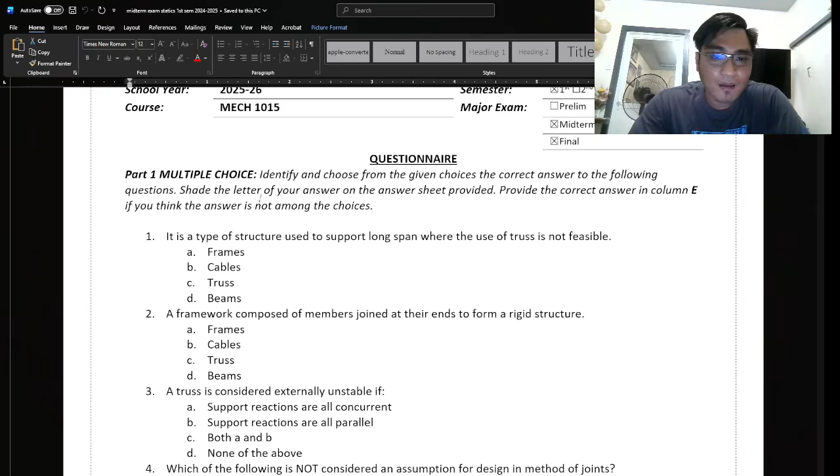So let's start para di na magtagal yung video. This is part 1. Let's start with the first 3 parts. Part 1 is multiple choice.

First question: it is a type of structure used to support long span where the use of truss is not feasible. The answer here would be cables, tama, kasi yun yung ginagamit natin. That's why you see cable type bridges like your mga big bridges na ang span niya masyadong mahaba, hindi pwedeng gawing truss.

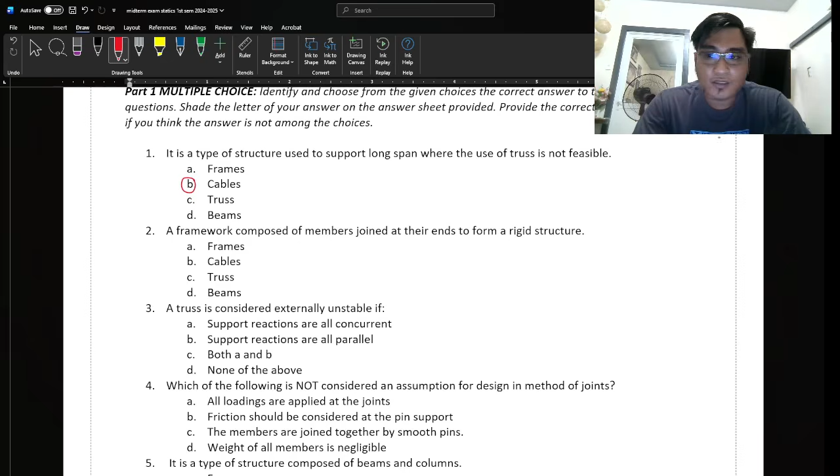Next question: it is a framework that is composed of members joined at their ends to form a rigid structure. Again, that's one of the basic definitions or characteristics ng ating truss. So the answer here is truss.

Number 3: a truss is considered externally unstable if support reactions are all concurrent, letter B, reactions are all parallel. So these are both correct. If it's concurrent, magiging unstable siya.

Tama, kasi for example you have a basic truss here. Let's just draw a very basic truss. So that's a truss. For example, I have a pin here, tapos dito magkalalagay ako ng roller. So ang support reactions mo would be eto, tapos dito. Kung papansinin mo, lahat sila tatama sa point A. So this will cause, ma-imagine mo, if I put a force here, no reaction would try to stop this from going down. Iikot lang yan.

It will just rotate at this point of concurrency, so unstable to. Same goes with if my supports are parallel, letter B. Pag parallel daw siya, tama. Since parallel siya, lahat sila vertical, there's again no one stopping the truss from moving horizontally. So both A and B are unstable. So the answer is letter C.

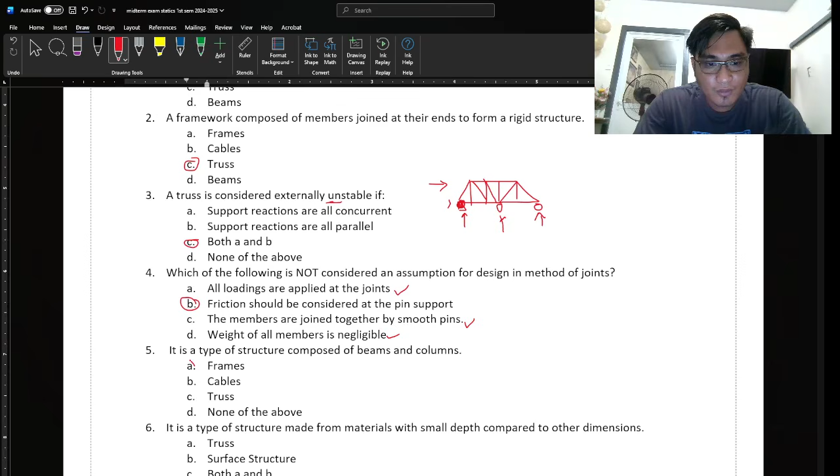So okay yan. Number 5: it is a type of structure that is composed of beams and columns. Binabanggit ko naman yan, lalo na nung nag-discuss ako. The answer for that is frames.

It is a type of structure that is made from material with small depth compared to other dimensions. The answer here is letter B, surface structure. Number 7: the combination of structural elements and materials is called, kita naman dyan, structural system.

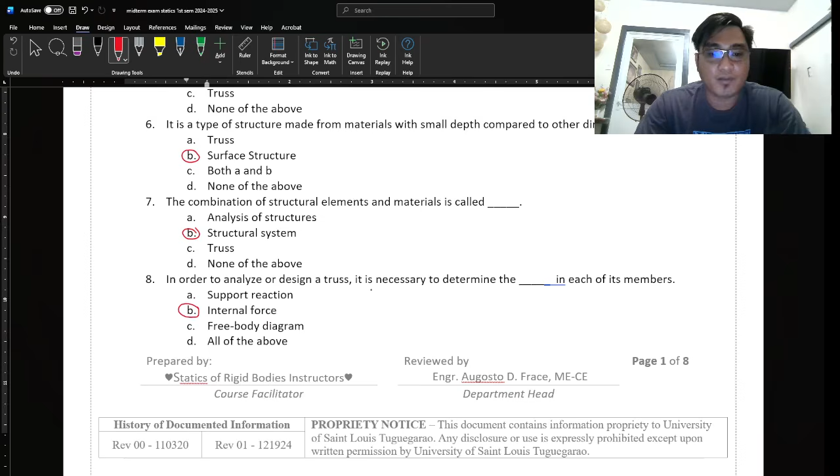Number 8: in order to analyze or design a truss, it is necessary to determine the blank in each members. Dito, hindi pwedeng all of the above kasi wala namang support reactions ang bawat member. The answer only is internal force. The internal forces are the tension and the compression force acting on each member. That's why we want to solve the internal forces of each members. So that's it, that's 8 points.

Next, determine the stability and the determinacy of trusses. Dito, napakasimple lang naman nung formula natin, which is yung ating b plus r, ko-compare natin yan, that's a question mark, kukompare natin yan with yung ating tinatawag na 2J, which is yung twice ng ating number ng joint.

So dito isa-isa lang rin: 1 to 23, so I have 23 members. Plus 1, 2, 3, 4, tama, pin-pin yan, so plus 4 reactions. This is comparing it to ating 1 to 13 joints, so that's 13 multiplied by 2, and this is just basically 27, which is definitely greater than 26.

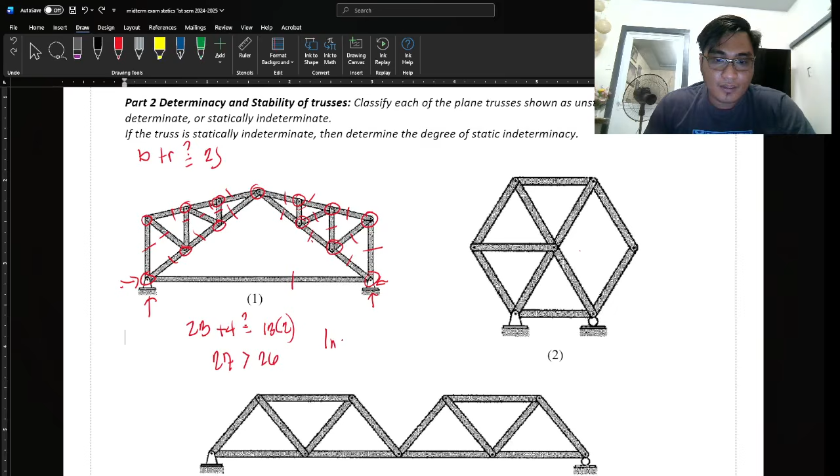So the answer here is, okay wait lang, let me just correct this. Indeterminate.

So to make it more specific, this is a first degree indeterminate structure. Why is it first degree? Kasi the difference between 27 and 26 is 1. That's why it's first degree.

So dito naman sa number 2, this is 1, 2, 3, 4, 5. So that's 5, 6, 7, 8, 9, 10, 11 members. So this is 11 plus 1, 2, 3. Tama ba? So 3. So this is comparing it with 1, 2, 3, 4, 5, 6, 7. So 7 times 2, this is equal to 14, equal to 14. So therefore, this is determinate.

Pero wait, what if it's unstable? Kasi not all determinate structures are stable. So let's look at the external supports. Since this is a basic pin roller combination, it's not parallel. Tama, hindi naman parallel yan kasi meron kang horizontal dito. It's also not what do you call this? It's also not concurrent. Tama, hindi naman sila nagko-coincide. So again,

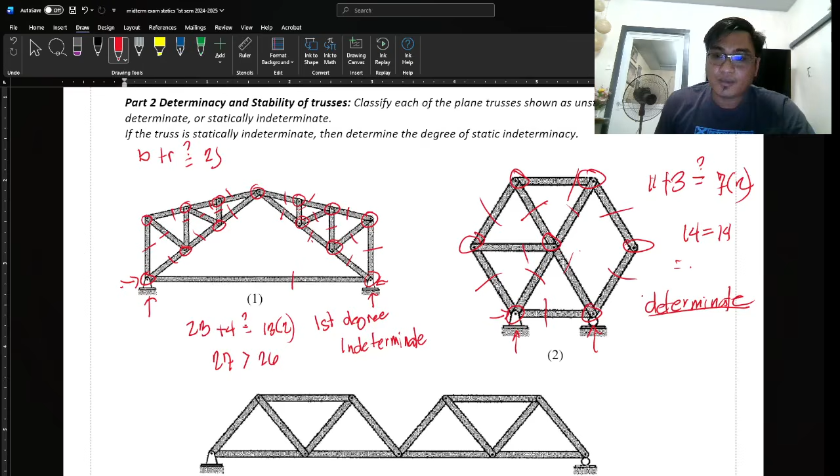That is now stable and determinate. Or kung determinate lang nilagay nyo, okay na yan, no?

So, dito, tama, balikan lang natin. Sa answer sheet, saan sa answer sheet? Yan, sa answer sheet, dito, first degree indeterminate. So, dito naman is determinate lang or pwede mong lagay determinate and stable.

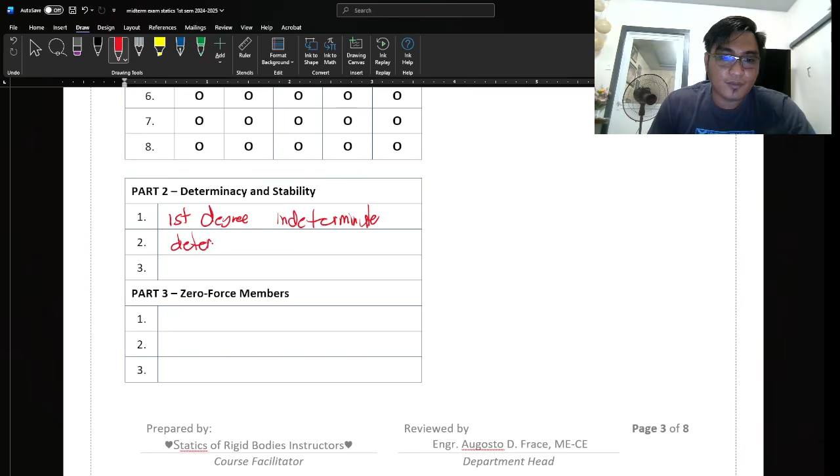Tapos sa pangatlo, let's just check. So, sa pangatlo, you have 1, 2, or kaya markahan natin para mas makita. 1 to 14. So, you have 14 plus, that's 1, 2, 3. Tama na. So, 1, 2, 3. This is equal to, or question mark, 1, 2, 3, 4, 5, 6, 7, 8, 9. So 9 multiplied by 2. So this is 17. This is less than.

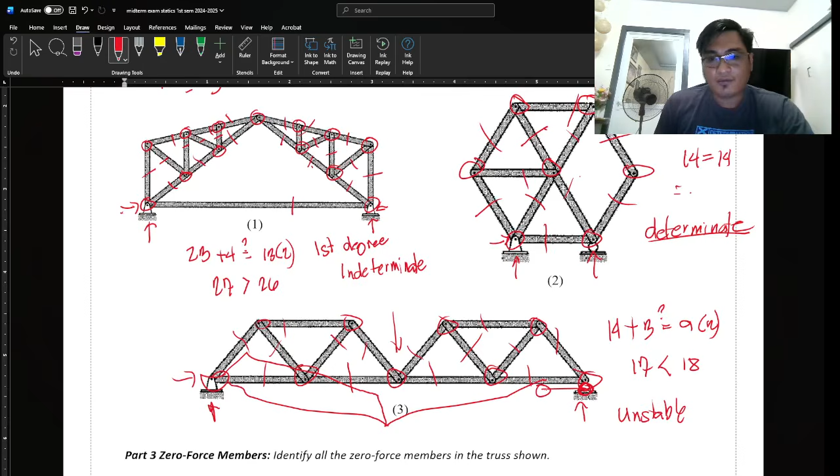Tama? Less than 18. So, tama. Less than 18. So therefore, this is unstable. Pero kahit titignan mo lang, kung tinulak mo to pababa, itong buong to, this one would twist down here. Kasi walang pipigil dyan. So, eto, pupunta lang dito. So, susunod lang yan. Etong roller kasi na to, pwede siyang mag-roll to the left. Okay? So, kaya it's an unstable structure.

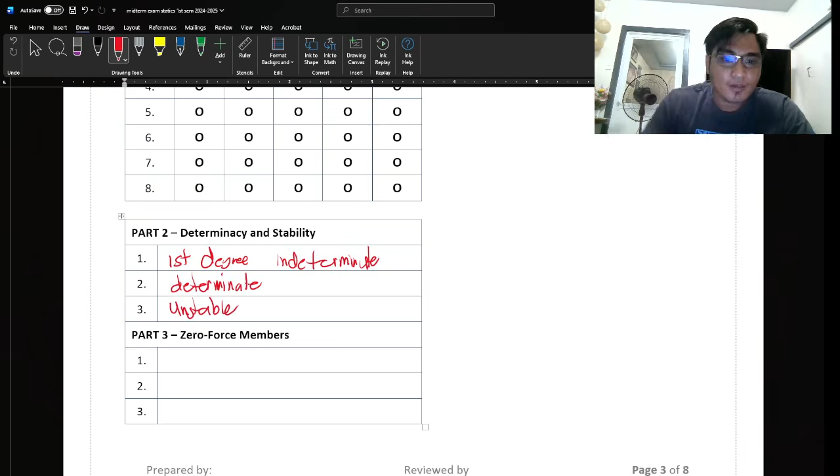So, dito sa question na to, this will be unstable. Okay. Next, zero force members.

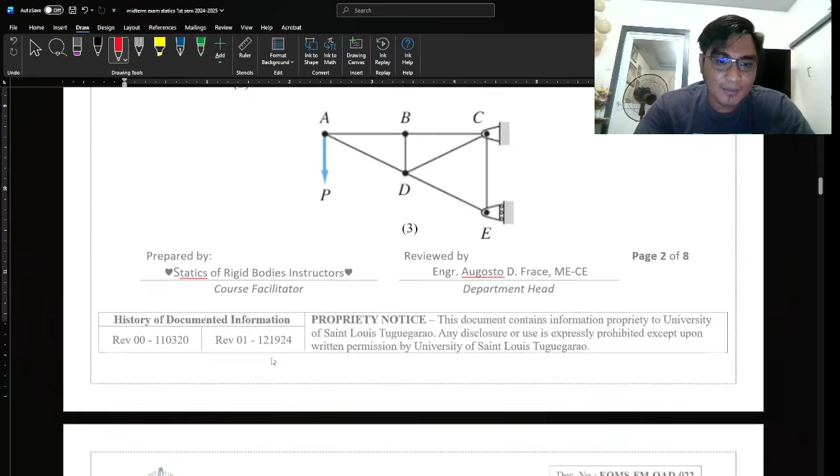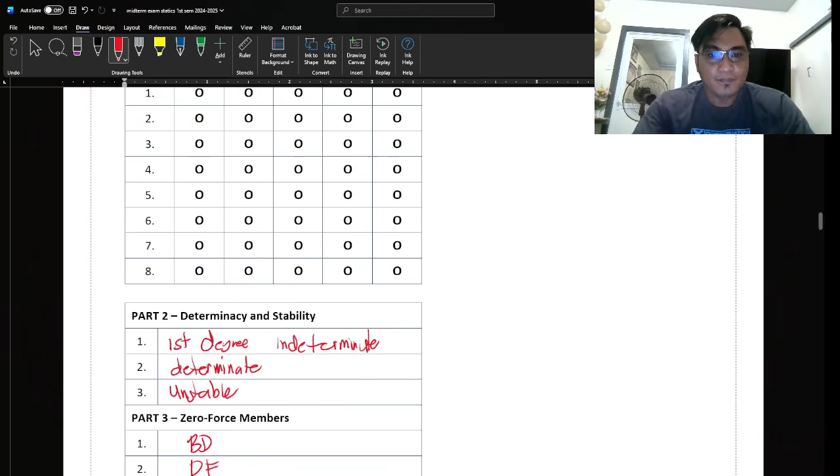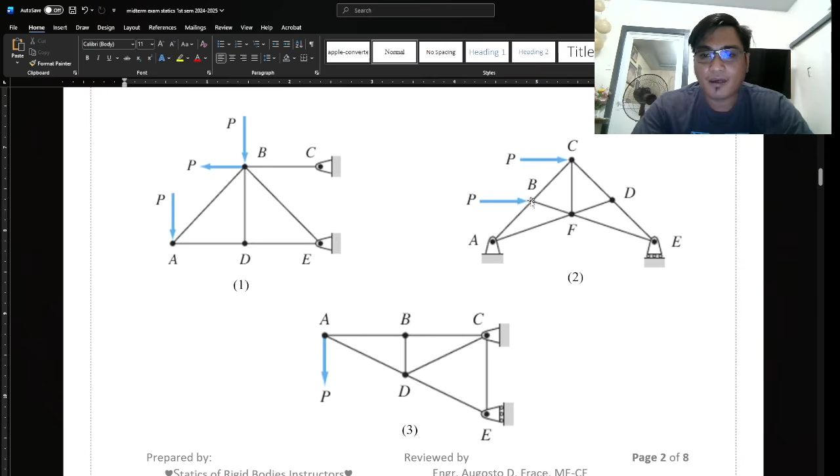Number 3. Wala naman na. Check lang ulit pala natin. Baka meron pa. Pag nawala to, okay. Yun na lang pala. Wala naman na. May member dyan. May force dito. Loaded dyan. So, hindi pwede.

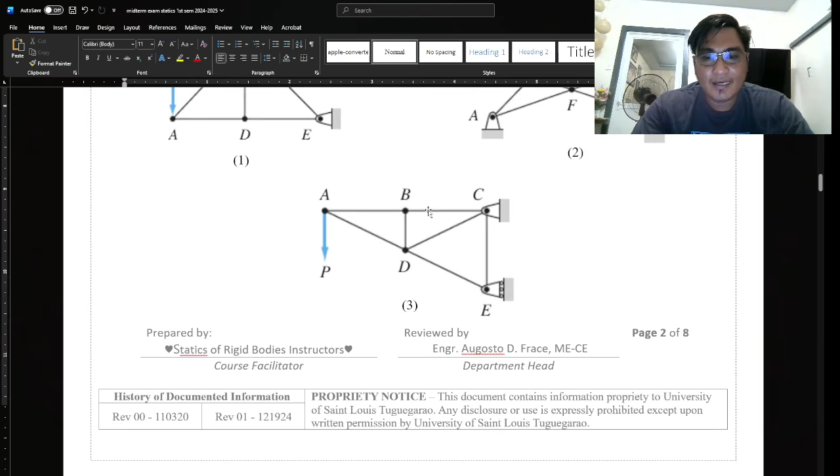Okay, dito naman tayo. Joint B. Ayun, kita-kita agad. Joint B. We have AB and BC as a collinear force or collinear member. May pangatlo kang member which is BD. So therefore, that third member, BD is equal to 0 or a zero force member. So ngayon, hindi lang kasi siya. Wait lang, may nangyari. Since nawala na to, tama, you can now just make this zero or remove this member.

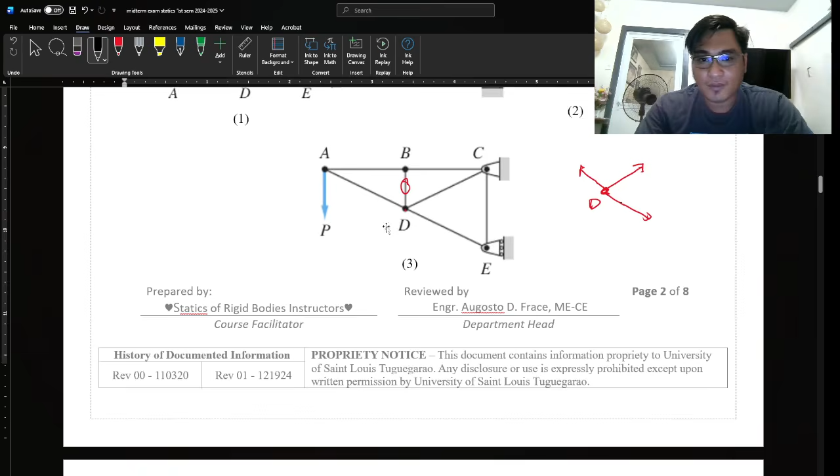Papansinin mo, dito sa joint D, since dapat, technically, ang member mo dyan, ito yung joint D, tama? This is joint D. Ito siya, no? Tapos, meron dito. Tapos, meron dapat to. So, 4 members yan. Hindi mo dapat siya magagawang or hindi mo dapat siya magiging case 1. Pero, since nalaman mo na agad na ito ay 0, so wala na yan. Ayan, naging case 1 na ulit siya. Since sa case 1, you have 1, 2, 3 members. And again, the third member, which is not collinear, is a zero force member. So, the member CD is also a zero force member.

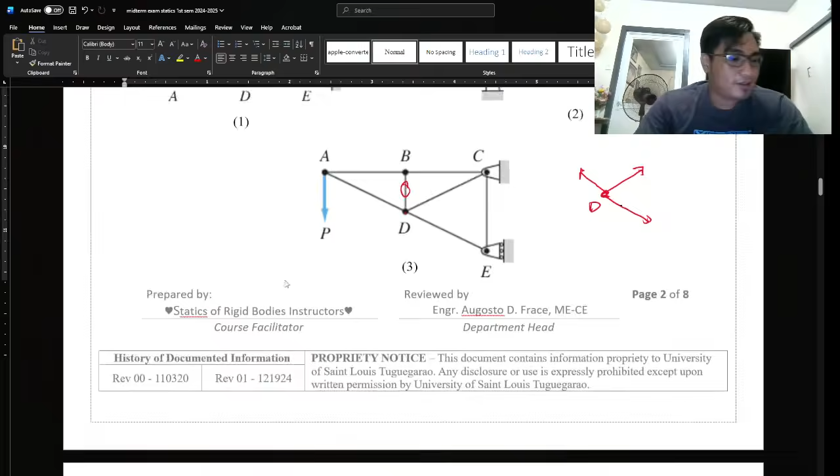So, sa number 2 or number 3, dalawa yung sagot. BD and CD. Okay, so that's it. Napakasimple lang nito. This is, wait lang, let me just mark this up.

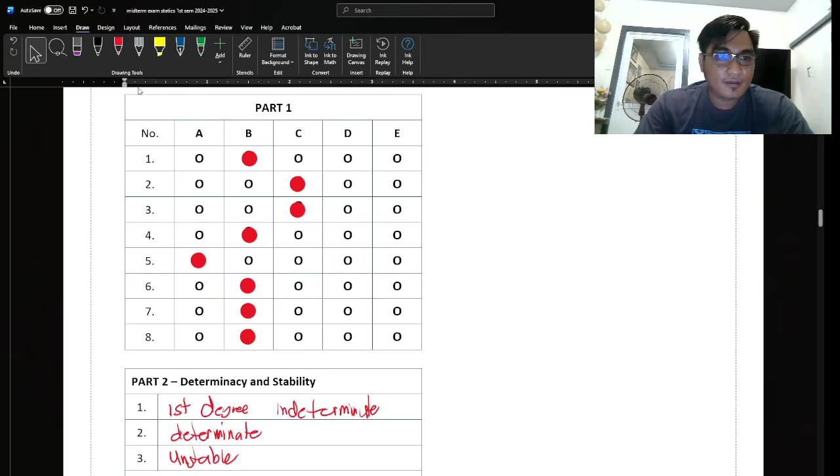Okay, so this is B. Palakihin na natin. B, C, C, B, A, B, B, B. So this is 8 points. This is 8 points, this is 6 points, 6 points. So this is a total of 20 points.

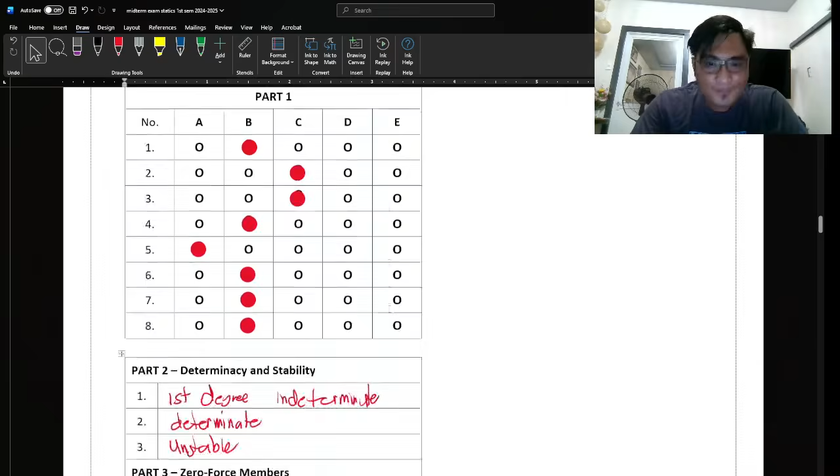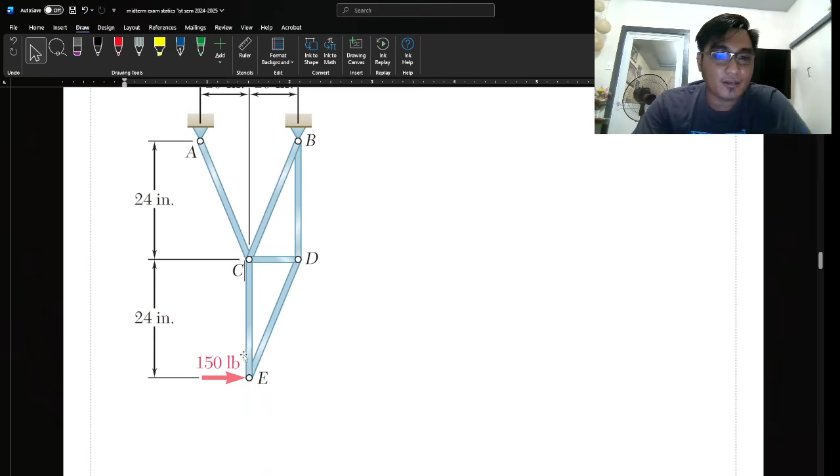Napakasimple lang, pag nakakuha mo na agad yan, that's a total of 20 points. Okay, now dito tayo. So dito you have problem solving, so sa problem solving you have two sets. Hindi lang nakalagay pero may dalawang set yan, iba yung values ng mga force or iba yung mga ibang numbers.

Okay, so let's just solve everything. Syempre para mas makita natin, punta tayo dito. So dito, you can see on the screen, may calculator sa gilid, no? Diyan na ako magka-calculate kung bilis.

So ngayon dito, you have two sets here. This is for set 1, set A. Wait lang, let me just check. Wala, tinanggal ko na yung mukha ko, para hindi ko na ako makita, baka nasasawa na kayo sa mukha ko.

So ito yung set A, yung heart. Tapos ito naman yung diamond. Makikita nyo pag binalik yung papel nyo yung heart, tsaka kung saan yung heart, tsaka saan yung diamond. So ito yung diamond, yung 240. So set A na lang natin to.

Kunyari yung heart, set B natin yung diamond. Tanggalin ko na lang muna to, no? Bigay ko yung final answer, pero the solution, ang solve ko lang itong para sa set A muna. Tapos bibigay ko yung final answer para sa set B. Okay?

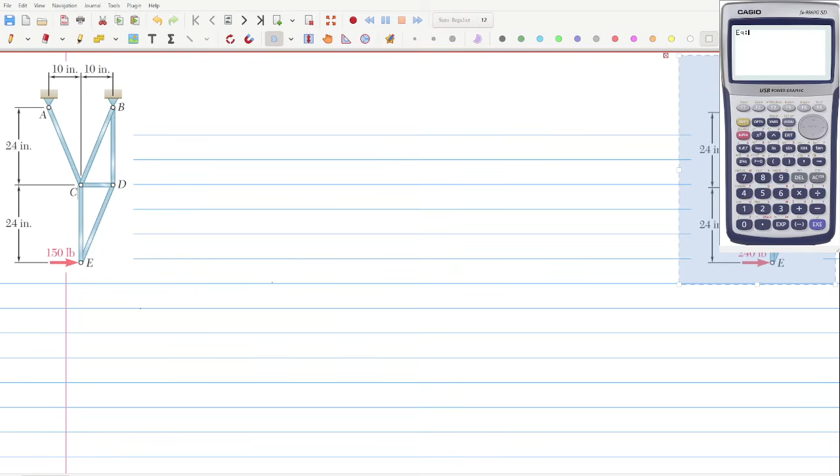Okay, let's just solve. Napalaki lang natin. Okay, so dito, as you can see, you have a very basic truss. You have 1, 2, 3, 4, 5, 6 members. Para hindi na tayo mahirapan, gawa na ako ng listahan, no?

So ang masasagot ko dito is AB, yung BC, yung BD, yung CD, tsaka yung CE. Next is yung DE. Okay?

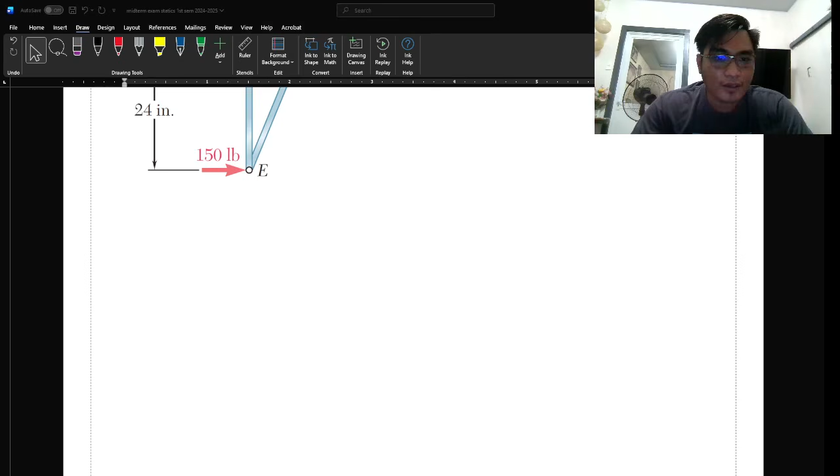So kung tatanungin niyo ako, wait lang, balik ko lang dito, no? Ang heart, ito, no? Yan. May makita kayo sa prepared ba, yung instructor, pag heart yung nakikita niyo dito, set A yan. Ito yan. So, oops, yan. Ito siya. Yan yung problem na yun, no?

Hindi naman importanteng alam niyo kung anong set niyo kasi focus dapat kayo sa papel niyo. Anyways, teka let me check kung ano na yung naka-flash, yan. Okey, so eto.

Tawagin natin 'tong set A, this is set A. So ilista ko lahat ng sagot ng set A diyan, ito yung heart. Tapos yung set B, ito yung diamond. So ayan, okay, so siyempre mamaya pa yan, sagutin muna natin 'to.

So dito, to start, I can just solve for the reactions. I think it's easy to solve for the reactions here. Tapos magsimula ka sa A, B, pero ako medyo parang hindi naman mahirap kasi hindi naman tinatanong ang reactions. Pansin ko kasi dito, I can just easily start at joint E.

Kasi sa joint E, even without knowing the reactions, dalawa yung aking forces o dalawa yung aking member. So again, since sa method of joints, the type of force system that we will have is a concurrent force system. Lahat sila tatama sa joint na yon pag mag-isolate tayo. So ibig sabihin, since if we have a concurrent force system, paalala ko lang sa inyo, pag concurrent force system, kahit gaano karami pa yan basta tumatama sila sa isang point, the only thing that we can do is do summation of forces X and do summation of forces Y.

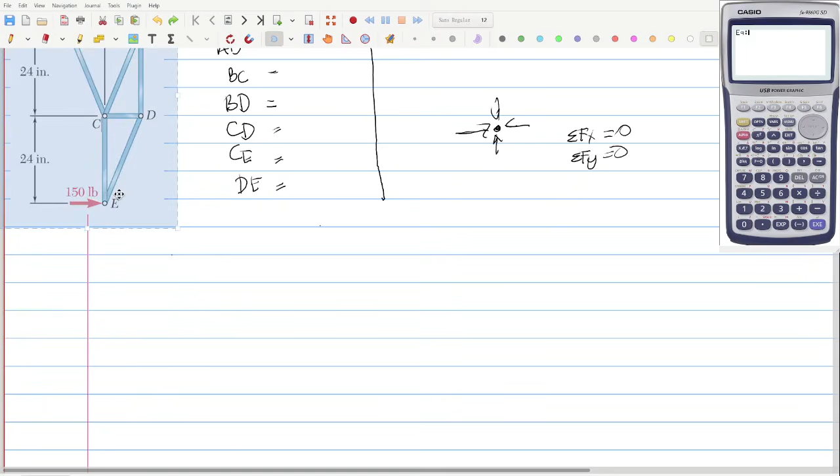So let's just start with that. Okay, wait before I continue, let me just copy this one. Okay, so dito, let's start, no? Joint E. So sa joint E, let's just consider this as my joint E. Sa joint E, meron tayong 150, tama ba? Yan.

Tapos na horizontal force, that's the applied force. Meron akong CE, I'm assuming tension na lang, no? So, gawin natin kulay blue. Okay, oops. So, vertical, tama, vertical lang yan.

Tapos dito, meron tayong DE. Okay, to make this a complete free body diagram, all I need to do now is to annotate or name every member. So ito yung ating 150, ito yung aking CE, tapos ito yung aking DE. Pero syempre hindi pwedeng force lang, yung pangalan ng force, kailangan meron din tayo ng ating slope.

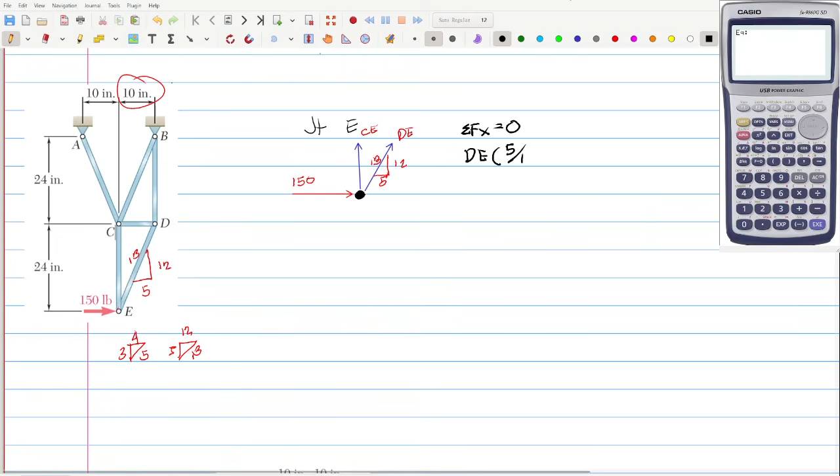Kasi kung titignan mo yung mga forces mo, the only X component ay sa CE tsaka sa DE, yung DE lang ang may X component, walang Y component yung CE. So, ibig sabihin, if I do summation of forces X, I can easily solve for the value of DE. So, ibig sabihin dito, DE multiplied by, this is horizontal, so X yan, no? 5/13. So, plus, pareha silang going to the right. So, plus din yan, 150. So, this is equal to 0.

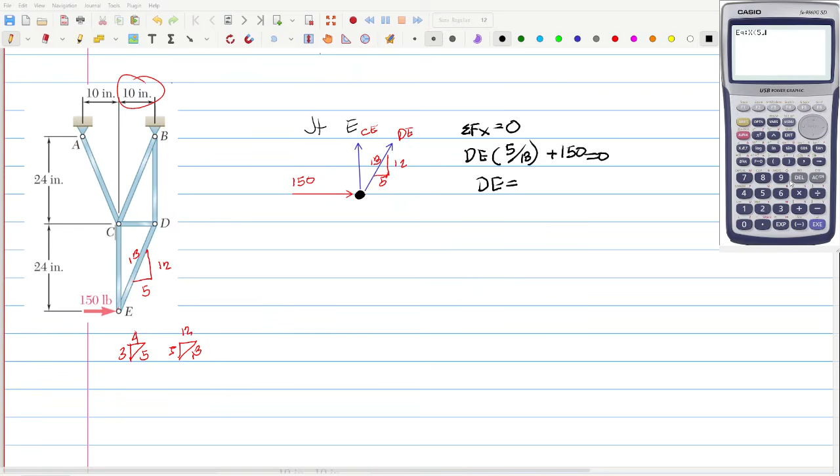So, therefore, DE is equal to, this is just basically DE. So, that yun yung X natin, no? Times 5 over 13. So, plus 150. Ano equals nito? Equal to 0.

So, calculate. So, solve natin yung X. So, X is 390. Kita naman. So, dito, this is 390 pounds. Negative pala, no? So, sabi niya negative. So, negative dapat yan. So, this must be negative 390 pounds. So, if it's negative 390 pounds, ibig sabihin yung assumption ko ng tension, mali.

So, compression siya. So, now, summation of forces Y, yung sa kabilang set, ganun lang. Napapalitan mo lang ng 240 kasi yun naman yung pinagkaiba niya. So, summation of forces Y, wait lang. Let me just mark this or let me just box this kasi this is a final answer. So, let's just draw it.

Yan. Okay. So, summation of forces Y equal to 0. So, this will be CE. Vertical na siya automatic. So, plus quantity, ito yung DE. So, negative na lang yan, di ba? Negative 390 multiplied by plus kasi going up siya, negative 390 kasi yun yung nakuha. Siyempre, multiplied by 12/13. Tama? 12 kasi yung kanyang vertical slope. So, this is equal to 0.

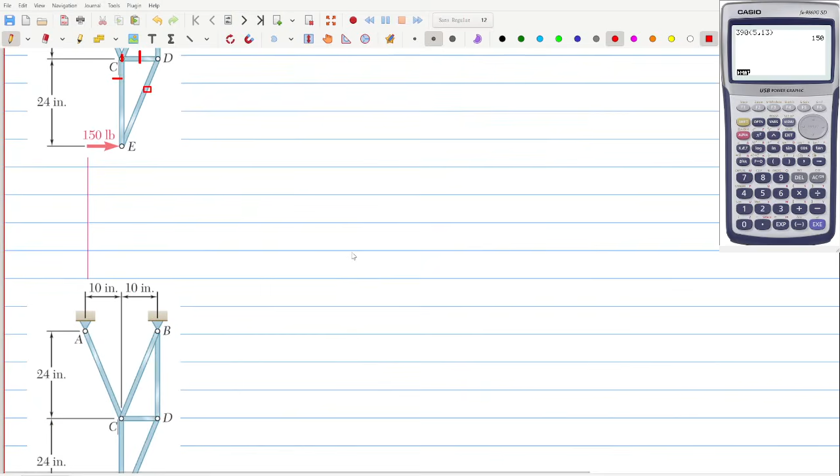Now, let's just go to BD and BC. So, pipihin ko na lang ulit to. Ayan.

Joint C, let's isolate it, let's make it black again. So if I isolate joint C, I will have here sa joint C. So meron akong alam ko na dati na CE, which is 360 tension, so pag tension, going away, tama? Yan, tapos dito meron tayong CD, CD is tension din na 150, so meron din tayong going away na 150. Assume ko na lang din na tension yung dalawa.

Tsaka eto, so again let's just look at the slope nila, no? Ang slope nila, 10 tsaka 24, tama ba? So this is vertical, horizontal, this is 10, tapos this is 24. Uy, looks familiar, bakit? Kasi nakita ko na yan kanina. Dito, tama, so kung 10, 24, naging 5, 12, 13, edi ganun din dapat yan. So 10 ang horizontal, so yun din, 5 din yung horizontal niya. So dito, ang slope din ibig sabihin nito is 5, 12, 13.

So same goes with this, ganun din siya, tama kasi 10 plus 24 din yung vertical. This is 5, this is 12, looks familiar lang yan, 13. Okay, so now I can just simply say that this is, sorry, A, C, tapos ito ay B, C.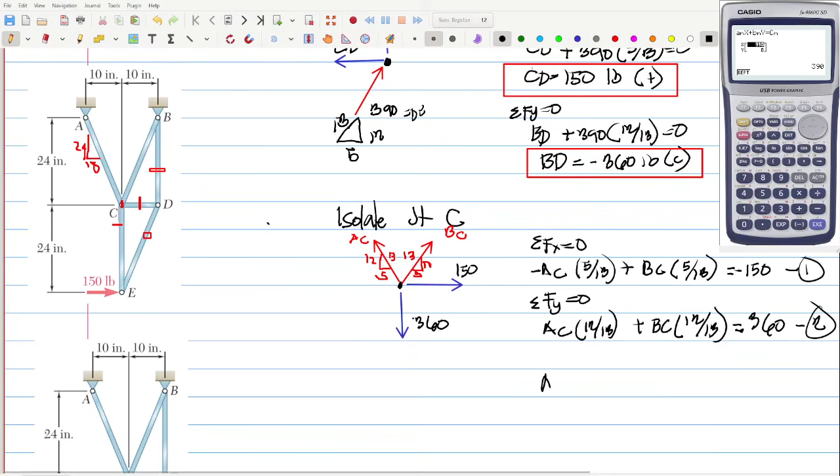And I will get that X, or yung aking first, which is yung AC, is 390. And my Y, or yung aking pangalawang unknown, is 0. Uy, so ibig sabihin dito sa ating solution, tama? Huwag kayong magtaka sa calculator, iba lang 'yan, ganyan din lalabas sa inyo, same values. So AC is equal to positive 390 pounds, so this is tension, tapos kasi positive yung nakuha ko, no? So and BC is equal to 0 daw. Okay, so wala palang force na tinatanggap yung BC ko, wala sa naman, so this is 0. This is 0. Okay, this is 390 pounds tension.

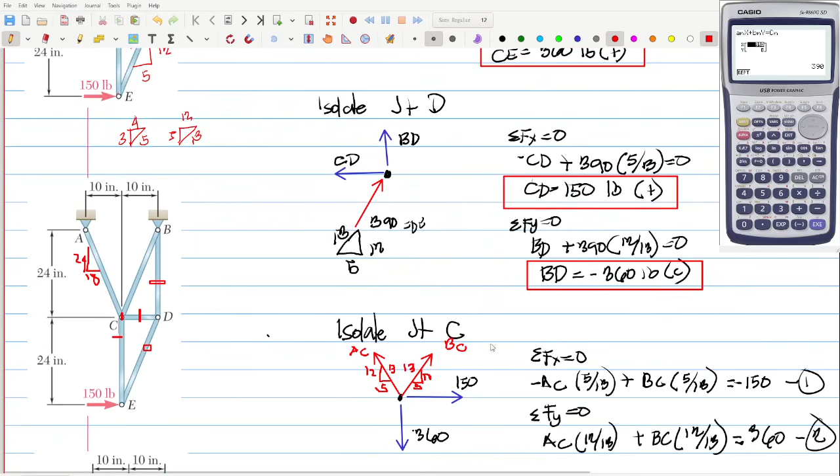So dito sa set B, I think this is 624, tama? Yan, 624 pounds, and this is under tension. So that's it, no? Napakasimple, no? Tatlong method of joints, puro summation of forces X, summation of forces Y. No? So it's very easy for you to get this. I hope everyone got this, kasi kung hindi, may kulang pa. You need to review more and you need to catch up.

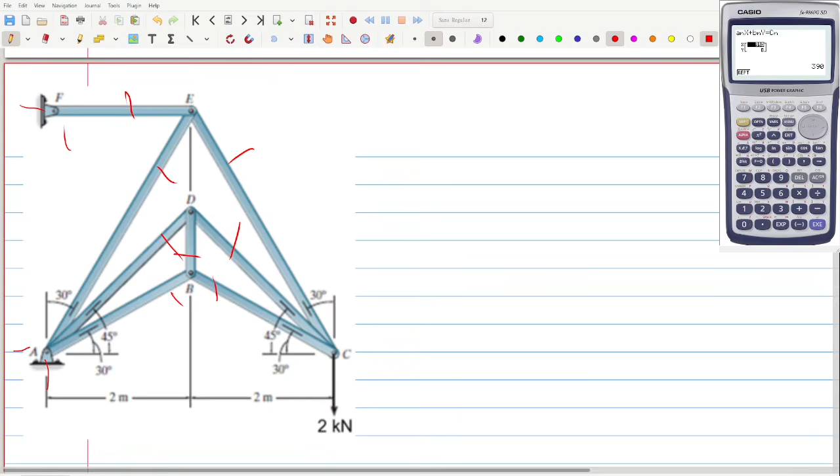1, 2, 3, 4, 5, 6, 7, 8, 9, 10, 11, 12. That's 12 because we have 10 members plus... wait, let me recount: 1, 2, 3, 4, 5, 6, 7, 8. So 8 members plus 4 reactions since there are pins. Comparing to 1, 2, 3, 4, 5, 6 joints, times 2, that's also 12.

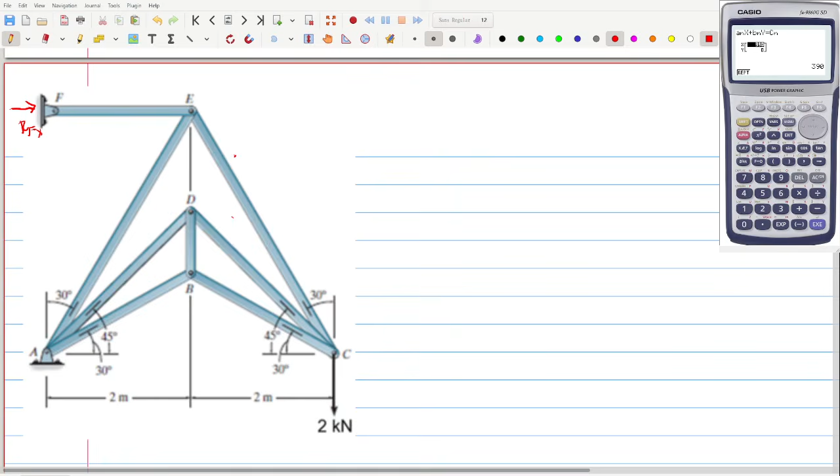Now let's look at the equations. Since I'm doing method of joints, let's find a joint first. Like before, I didn't need to solve for the reactions, so maybe here too I won't need to. Let's look for a joint with only two unknowns. None here, none here, none here, none here — so that means I really need to solve for the reactions first.

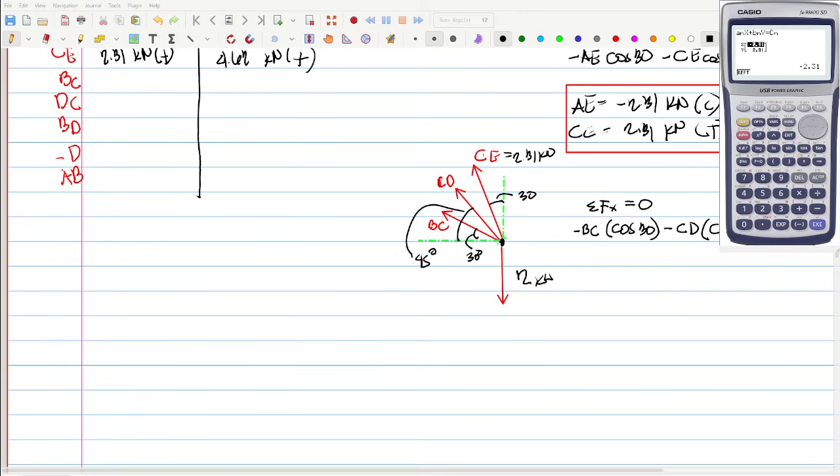Tapos, let me just check, parang baka natakpan. Natakpan nga. Okay, wait lang, let me just move na lang to. Okay na ba? Ayan, okay.

So, dito would be Fy, sorry, minus ulit. Minus CE which is 2.31 multiplied by, ito nakadikit yung 30 degrees ng CE sa vertical, so ang opposite niya yung horizontal. Opposite is sine 30. So this is equal to 0.

Wala naman ng x component na iba, so ayusin mo lang ng konti. Ito, lipat mo sa kabila, ito, lipat mo sa kabila, so magiging positive yan. This is equal to positive 2.31. So this is now my equation number 1. Pwede ko namang ilagay sa calc itong 2.31 sin 30 mamaya.

Next, summation of forces along y, this is equal to 0. BC sin 30, plus kasi pataas naman silang lahat, plus CD sin 45, this is minus, yung 2. So minus 2 plus 2.31 cosine 30, kasi adjacent niya yung y-axis.

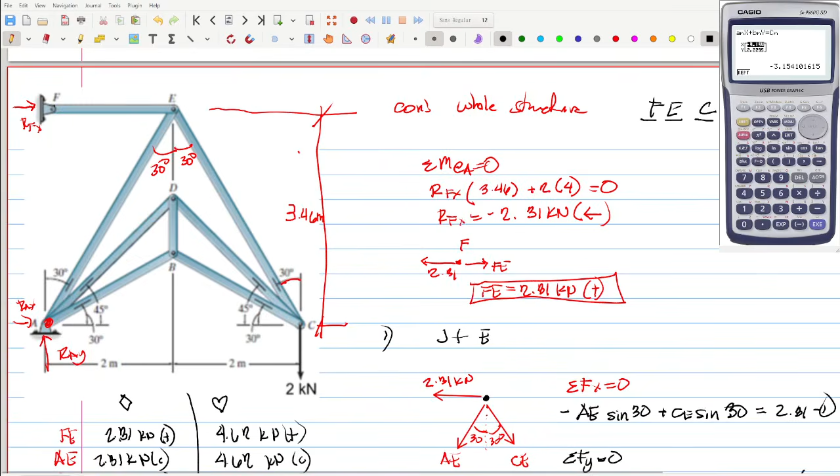Nasagot ko na rin yan. Next, ang game plan natin ito, di ba? So next, D, punta sa joint D. Wait lang, let me just copy this one na lang. Okay, so sa joint D, ito yung joint D natin, this is your joint D. All you need to do again is draw the free body diagram.

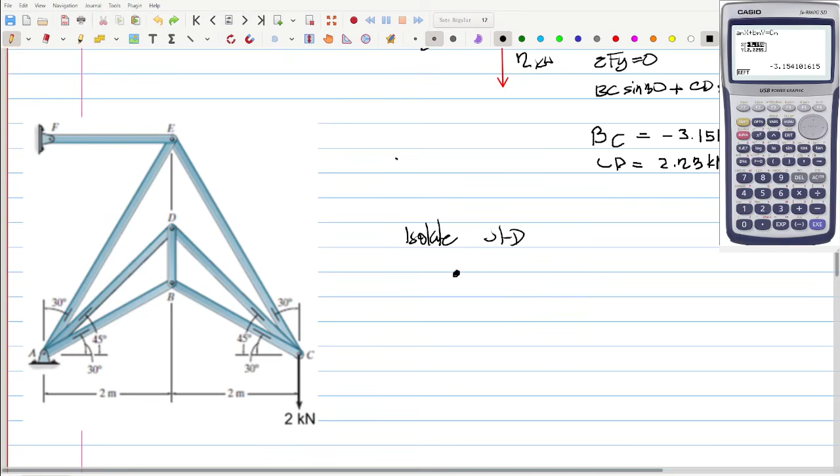Okay, isolate this third joint, joint D. If I isolate joint D, you will have three forces. But one is already known, which is CD - you will have CD with 2.23 tension. Then here too, we also have one, notice they're both 45 degrees. Then I also have a tension here - I'll just assume that's tension too.

Okay, so this is 2 point, because this is CD, right? This is CD, this is BD - this is BD, then this is AD. CD is already known to be 2.23 tension, so it's going away.

So here, if you do summation of forces along X, this is equal to 0. You know this is 45 flipped - the given isn't there. Wait, wait. So since this is 45 degrees, if I draw a horizontal line here, and that's 45, alternate angles are congruent, so here it's also 45 degrees. Let me draw a line here, wait.

Let's make this green for our reference. So I make a line here. See it? Okay, this is 45 - oh, can't see it, too bright. Let's make it pink instead. This is 45 degrees, so of course, same goes here - this is also 45 degrees.

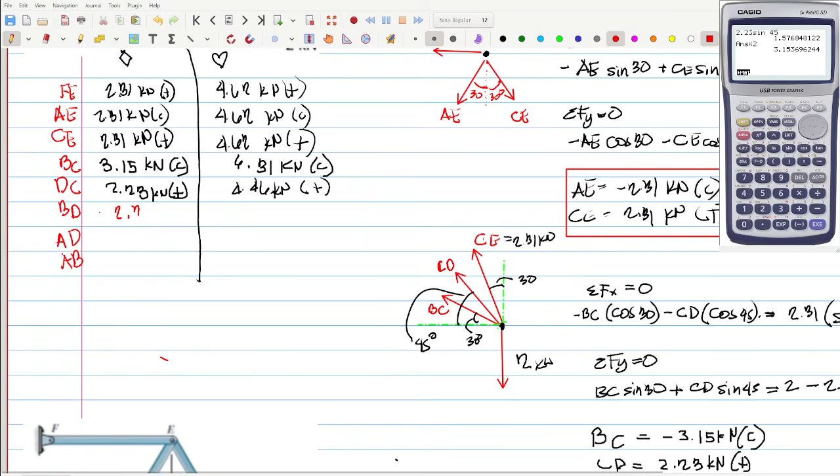Okay, that's another answer. So now, having said that, BD is equal to - wait, what was that earlier? BD... oh this is AD, AD is that. So BD is... are we right? Oh, BD is 3.15. There, BD - it's black. 3.15 kilonewton, and this is under compression.

For the other set, I think this is just 6.31 or 6.3 kilonewton, and this is also under compression. Our AD will be 2.23 kilonewton, under tension. Then this will be 4.46 - once you get this, solving for the other set gives 4.46, also tension. Wait, my handwriting with the mouse is ugly.

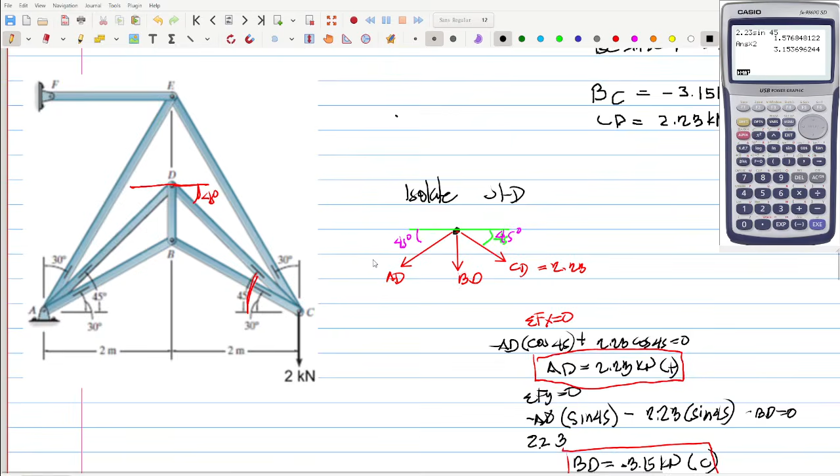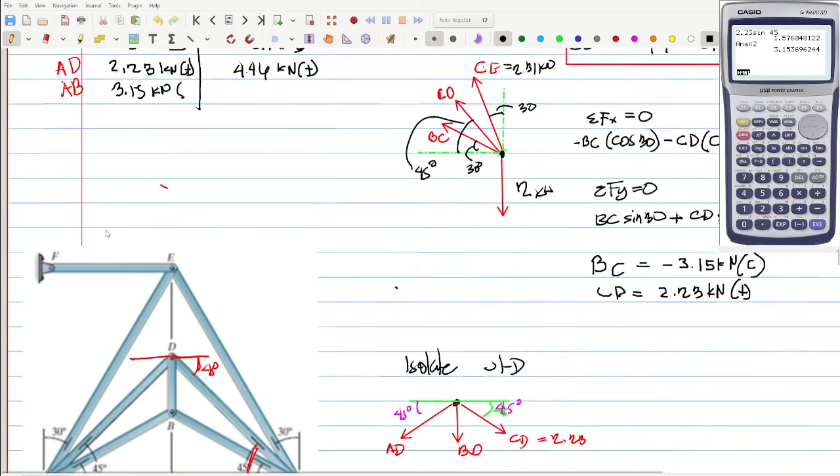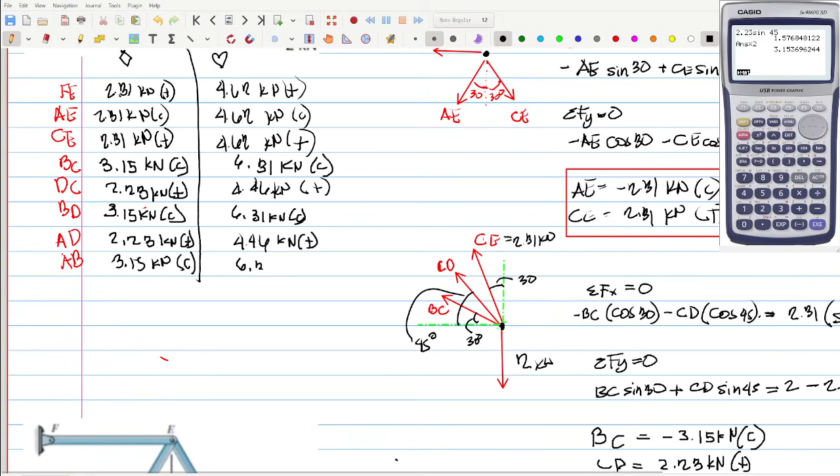4.46, okay, next is AB. So for AB, it's not different, right? Isolate it - oh, it's just like before, exactly the same, just sin 30 here. 30 here earlier, then 30 here too. So you should know, since that's how it happens without even solving, BC is equal to AB. So BC, which is 3.15, means AB would also equal 3.15 kilonewton. AB - what's its counterpart? BC. What's BC? 3.15 compression, so therefore AB is also in compression. Same here too - 6.31 kilonewton, and this is under compression. So this is number 2.

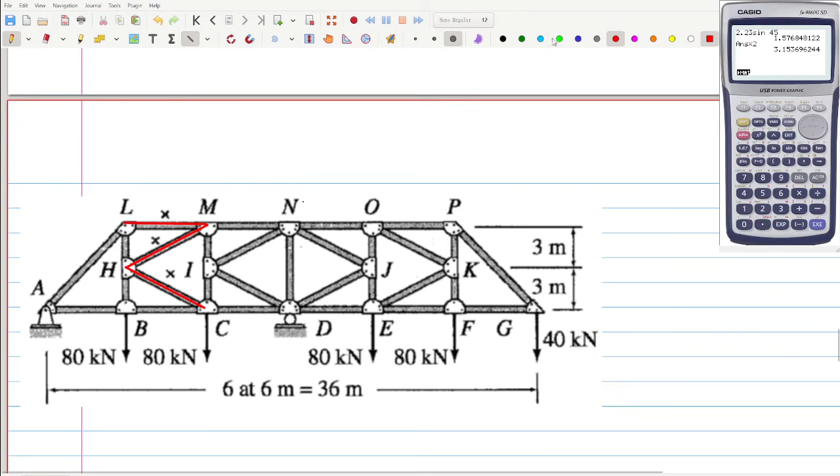Okay, so ngayon, the question is, how do we solve that? Method of sections, K-truss, alam to. Binigay kong example, binigay kong lecture video, binigay kong assignment. So dapat alam nyo na yun, no? Pagka K-truss, method of sections, kailangan mo lang putulin ng ganito.

So let's just call this cutting plane AA. Okay, kung magka-cutting plane AA ako, tama kasi ang mapuputol ko LM, LH, BA, BH, tsaka BC. Ngayon, kung iisipin kasi natin, masosolve na natin yung LM by taking moment at B. So makikita naman maya-maya, kung di mo magets ngayon, makikita naman natin mamaya. Pero masosolve natin yung LM.

Ngayon, kung i-consider ko left side, mas okay kasi konti lang drawing ko ulit. Pero if I consider the left side, I need to solve for the reaction at A. So let's just first isolate or consider the whole structure. So consider natin, ang whole structure natin, ito buo muna.

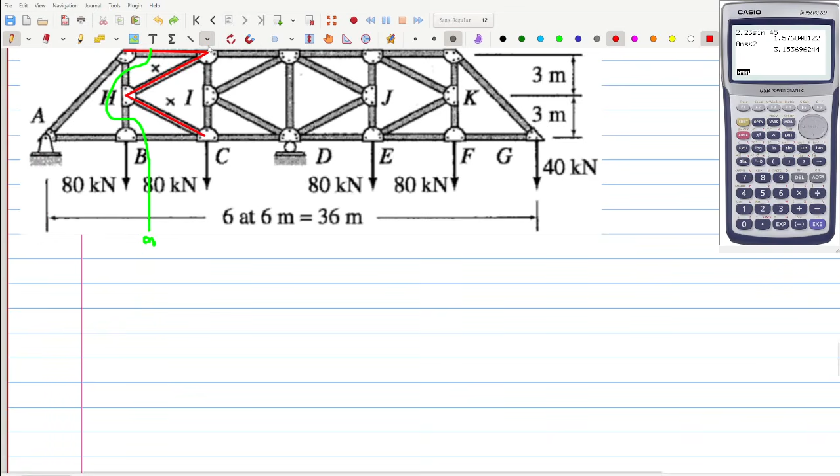So this is an arrow. Ito, assume ko na lang na going up, yung RAX, hindi ko na drawing kasi alam ko naman na pag nagsabi siya ng forces X ako, magsi-zero yan. Okay, so ito daw ay RAY, kasi ito ay RD. Okay, so ngayon, if I take summation of forces along X, pag summation of forces X ka mag-iwan, RAX equal to 0.

So summation of moment na lang tayo diretso. Sa D ako mag-moment, tama? Pag nag-moment kasi ako sa D, mawawala na yung RD. So ang meron na lang na unknown ko, RAY. So I will be able to solve for RAY. So summation of moment at point D, so we will have RAY.

Teka nga, nakikita ba? Tatakpan natin, nakikita ba talaga? So natin natin sa baba gawin. Summation of moment at D is equal to 0, so we'll get RAY. In-assume ko na clockwise, no? So that's positive, so ito, and so that's clockwise. So RAY multiplied by 6 yung isa, no? 6, 12, 18, so 18 to.

Minus 80 times, 6, 12, 18, tama, times 12. Minus another 80 times 6. RD wala na, so doon na tayo sa D, sa 80 na kabila. So itong mga 80 na to kanina, negative yan kasi counterclockwise. Ngayon itong 80 na to, clockwise na to kasi positive na yan. So this is a plus 80 times 6, again plus 80 times 12.

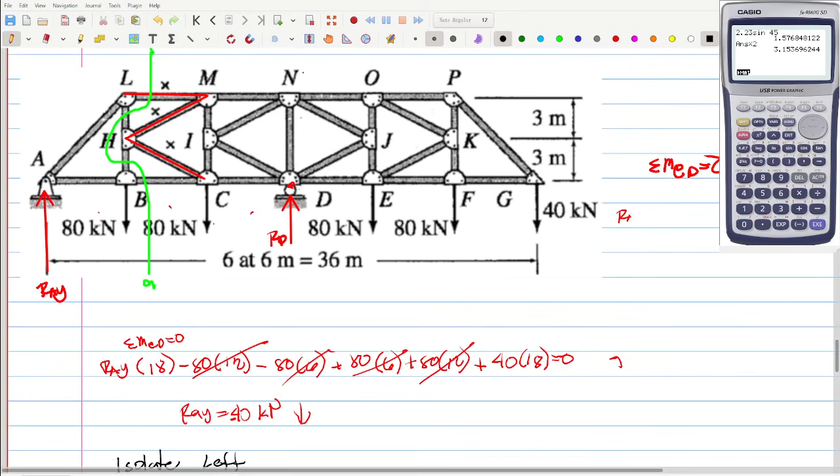Okay, now after solving for RAY, I can now just isolate. So isolate natin, ba't nga pala yan, ayan. Isolate left side, tama? Left side, ito, ayan, left side of cut AA. Tama, okay, if I isolate left side of AA, drawing na lang natin ulit, I will have this one.

Tapos from this one, ang lang pala siya. Ito hanggang let's say dito. Tapos, ayan, wait lang, para hindi tayo mahirapan kasi baka ano, palakihin natin. Let's make this block.

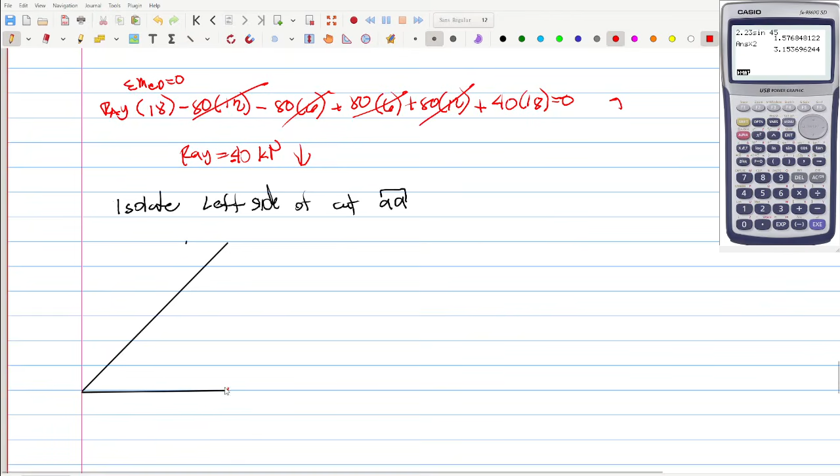Okay, para hindi lang mahirapan, palakihin ko lang. Okay, ayan. So dito, meron akong nasolve dito. Sa A is, so ito yung ating point B, tama ba? B. So ito yung ating point L. So sa point L, wait lang, let me just, ayan.

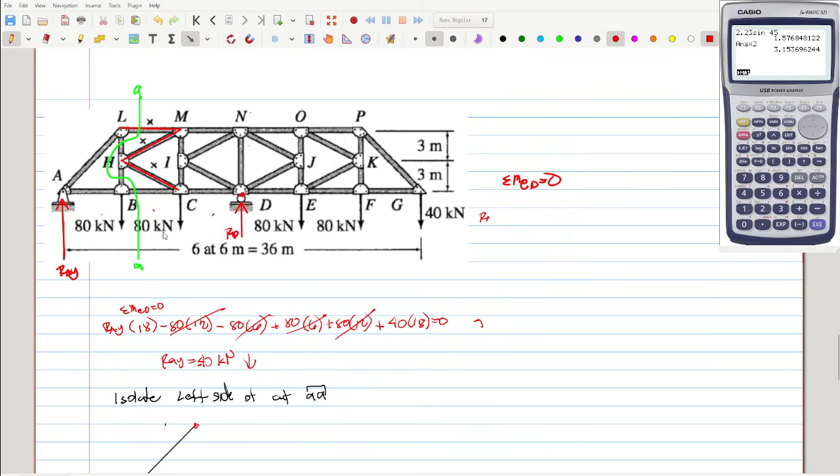So sa point A, meron akong na-compute na RA which is 40 going down. Tapos dito, sa point B, meron akong 80 na going down. Okay, so yung mga naputol naman, that's all the applied force na kasi. So LM, assume ko na lang din na tension.

So ito, LM is tension. Tapos ito, mayroon naputol na LH, assume ko na tension din. So dito, ganun din, may naputol na BH. Tapos may naputol na BC. Tama ba? BH saka BC. So in-assume ko lang ulit na tension. So pangalanan lang natin sila, no?

Para madali. So this is LM. This is LM. This is LH. Tapos this is BH. This is BC. Okay, so if I take moment at point B, tama, pag nag-moment ka sa point B, ang moment arm ng BC, 0. Moment arm ng BH, 0. Tapos pag in-extend mo yung LH, tatama rin siya sa point B, so 0 din yun.

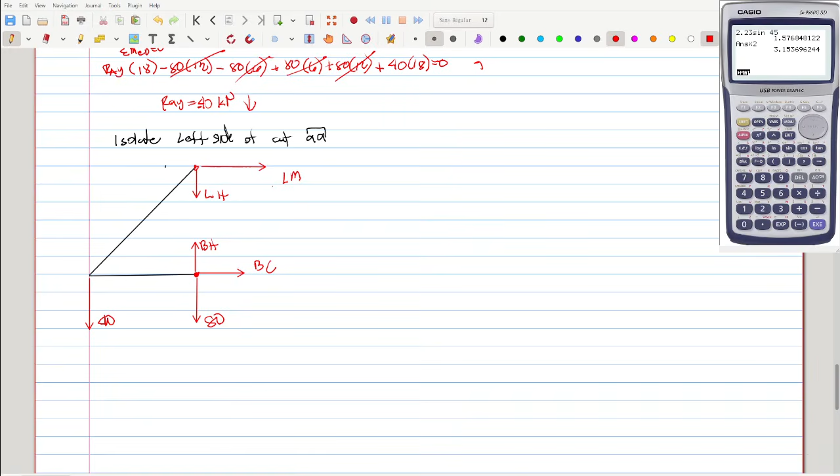Okay, so alam mo na yung gagawin mo, no? Ngayon, ito, kumpletuhin lang natin. This is 80, this is 40. Sabi ng set ata, magiging 80 to. So if I take summation of forces there, ay, kumpleto lang natin. 6 dyan. Tapos yung height niya is, I think 6 also. 3 plus 3. So yung buong height niya, eto, hanggang dito is given as 6 meters.

So if I take summation of moment at point C, this is equal to 0. So you will get, unahin na natin yung unknown, LM multiplied by 6, tama? So that's clockwise, so positive, minus yung 40 natin, tama ito, 40. So this is minus 40. Moment arm mo is 6 din, tama ba ito? Yung distance na to hanggang dito, this is 6.

So this is equal to, wala naman na kasi yung 80 tatama din sa point C, BH tama sa point C, BC tatama sa point C, LH tatama sa point C. So now you will get that LM is equal to 40 kilonewton. Positive, so ibig sabihin, tension siya. So I now have one answer that is my required.

Okay, so now, after doing this, I can just also do summation of moment sa point A. Sorry, sa point L. I can go for BC pero hindi naman tinanong. So kahit skip ko na yan. Kung ginawa ko, okay lang din.

Okay, so now, having known LM, gawa tayo ng bagong putol. No? Yung putol na gagawin natin is just a straight cut here. Tama? Yan. Yung putol na yan, putulin natin yan dito. So tawagin natin yung putol na yan na B. So isolate natin.

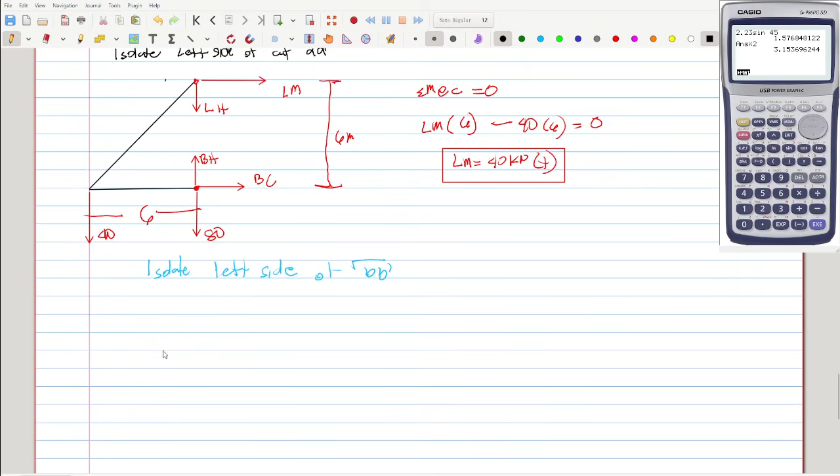Pero hindi naman tinanong, focus tayo sa HM tsaka HC. Okay, so that's it. After doing that, if this is already solved, alam mo na agad na solve na yan. So eto. Tapos, oops.

Okay, so dito, ang mga naputol, wait lang. Lagay lang natin yung arrow. So dito, meron akong 40 na going down, dito, tama? Kasi ito yung point A. Tapos dito, meron akong 80 na going down. Yan yung point point B.

Ngayon, dito sa point L, meron yan nandito. Ito yung LM. Tapos dito sa point B, meron din yan. Yan yung BC. Tapos dito sa gitna, meron yung pababa. Ganito. Tapos dito, meron yung pataas. Ayun. Dito. Okay, so let's just assume na it, ito yung dalawang point.

Okay, so now, to make the free body diagram complete, syempre hindi naman kumpleto yan no, pag walang details. So dito, this will simply be given as 40, this is 80, this is LM which is already solved as 40 kilonewton. So this is, what's this again? Sorry. This is HM. HM which is one of my unknowns. So this is HM, tas ito ay HC, tas ito ay BC.

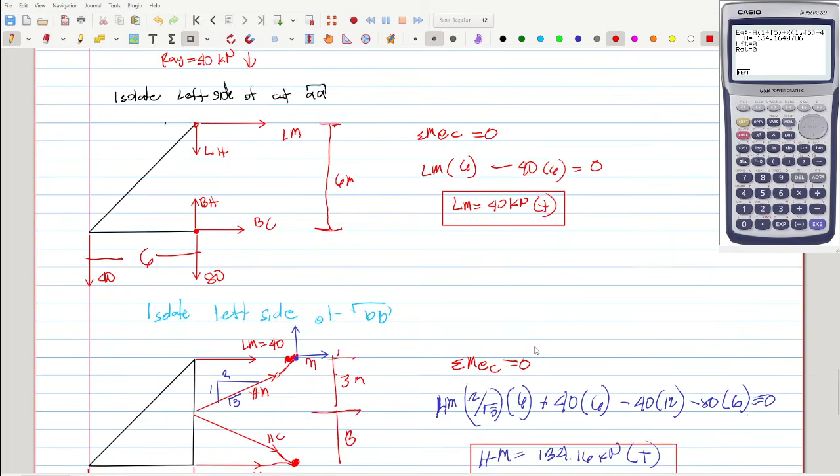Eh pag ginawa niyo naman sa calculator niyo to, parehas lang ang makukuha niyong sagot. So ay, parehas sila, no? 134.16 din, so HC, pero negative dito. Negative 134.16 kilonewton, and this is under compression. Okay, so tapos na tayo. Ilang minutes to? Yung may kasamang explanation, how long did we do? 3 minutes overtime lang. So here, na yan. Dalawa pa pala, yan, so dito para mas, ilista ko lang, no?

So dito, HM or LM, oops. LM, HM, tsaka HC, ito yung mga hinanap. So para sa heart or sa set A, tapos sa diamond sa set B. So dito, para sa heart, 40 to na kilonewton, this is tension. Dito, I think 80, if I'm not mistaken. So ito syempre tension din yan. Tapos dito, 134.16, ito naman 134.16 din, pero ito ay compression. Ito baliktad, HM ay tension, tapos ito ay compression. So ganoon din dito, ito parehas lang din yung sagot niyan, tension, tas ito 134.16 compression. Okay, so same lang sila ng sagot except dun sa LM. Okay, so that's it.

Pansit. Okay na yun, pwede na magpansit.

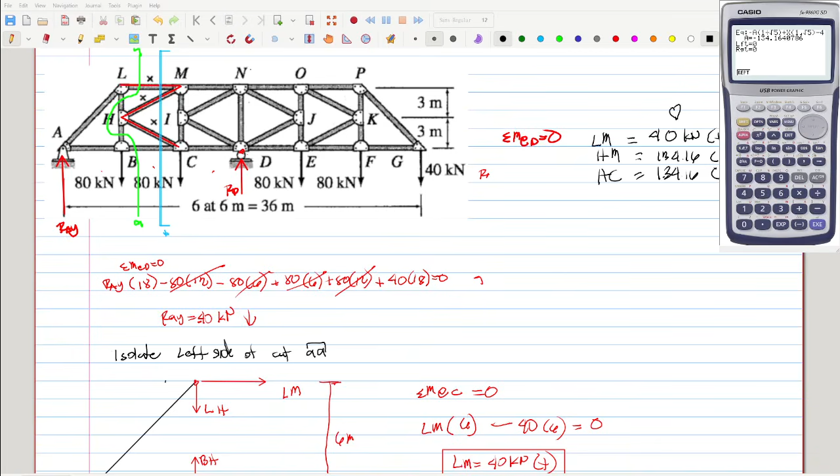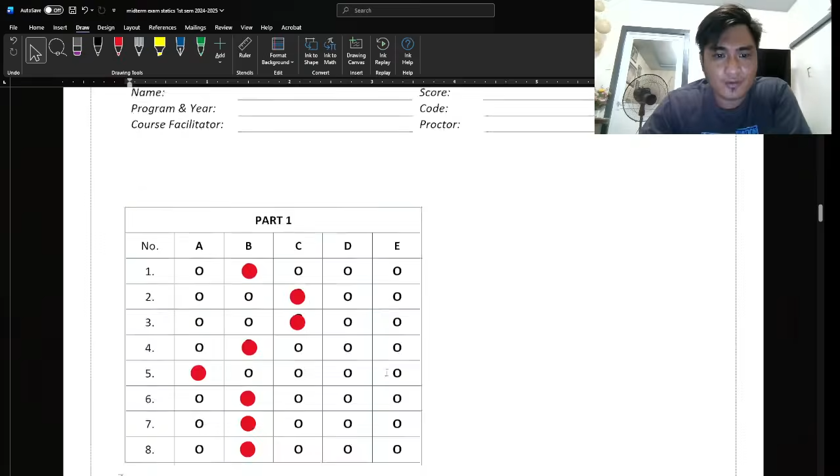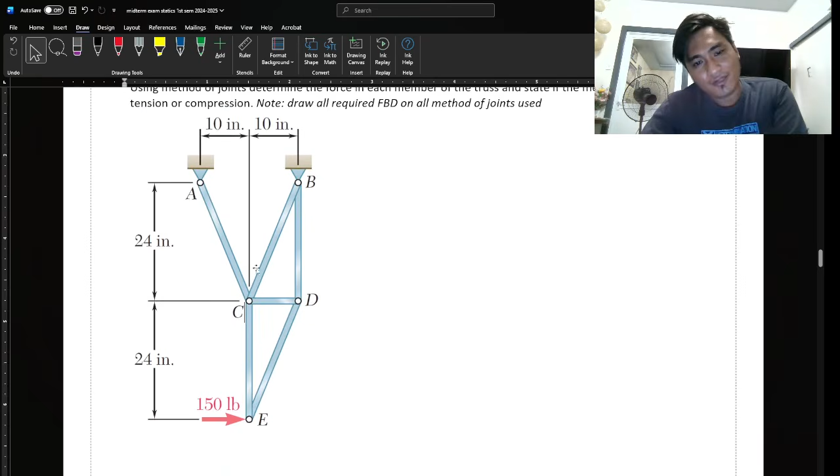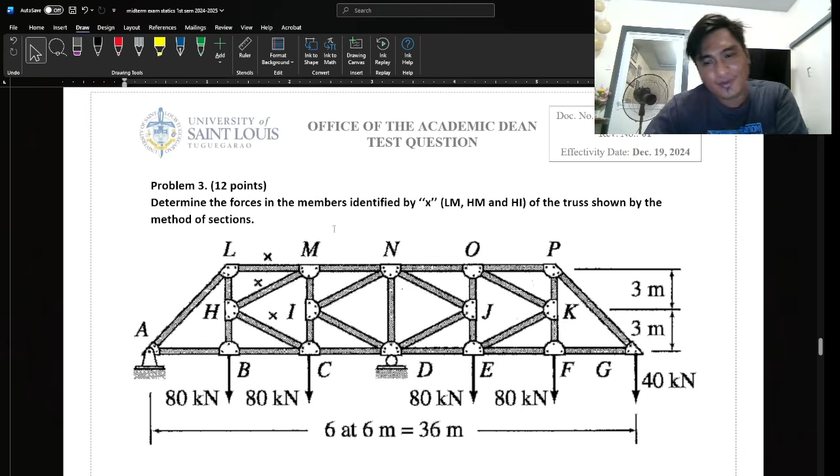So ayun, I hope you got most if not all, wala naman kasing mahirap, no? Paulit-ulit lang. Siguro dun sa, nung ako nag-solve nito, medyo pinaka-natagalan ako dun sa number 2 kasi medyo nakakalito yung mga slope or mga angles. Pero hindi naman ganun kahirap or hindi naman mahirap yung flow ng solution niya, no? Tapos lalo na to, dito, easy 20 points. Ito, ito yung pinakamadali, oh. 14 points pa yan, 1, 2, 3, 4, 5, 6. So this is easy, 14 points. So dito naman, again, 14 points din. Ito, 12 points. So napakadali lang talaga. Sobrang dali lang, walang mahirap, mga kapatid. Mga, ano.